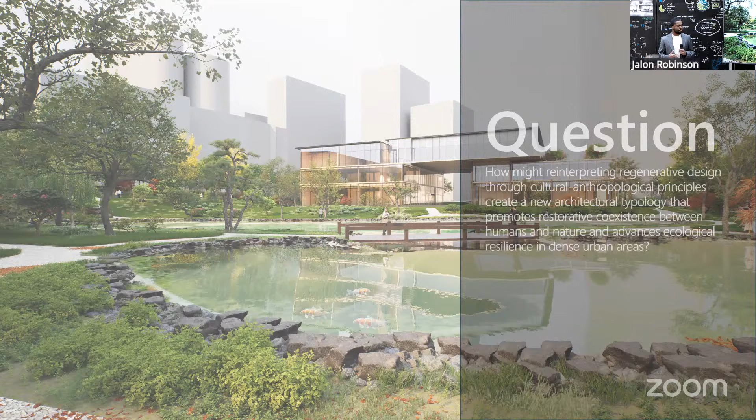Good morning, I am happy to be here. Today I'm going to start us off with: ecological performance plus human meaning equals a new way of living. To start, I want to thank my chair Professor Tillman, Professor Martinez, my mentor Balis Bogner, and Professor Kelly. This project stemmed from my interest in Japanese culture and architecture, and how using cultural anthropology as a base can reshape regenerative design.

This approach promotes human-nature relationships and restores urban landscapes. Dense cities often fail to fully integrate performance with cultural traditions, limiting the effectiveness of sustainable design. This thesis proposes a method of using cultural anthropology as a basis to create a connection, using strategies such as biophilic design, regenerative design, and natural materials to uplift the landscape and urban environment.

This architecture will embody core themes engaging with the public, blending ecology, wellness, and culture, in addition to shifting the architecture from a more passive sustainability to a more active ecological restoration.

In order to do this, we have to understand place, and I have been fascinated by Japanese culture and aesthetics, knowing Tokyo and understanding the dense tradition, its urban fabric of dense traditional and modern fabric, and its rapidly modernizing and rich multicultural history. Using this as a framework, as a test bed, would be excellent for this thesis.

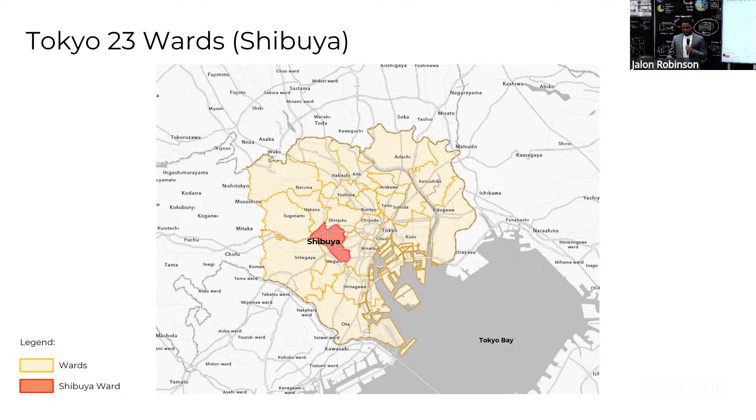Zooming into the 23 special wards, showcasing Shibuya within the special wards close to Tokyo Bay, and really looking at the cityscape. This image captures the vibrant energy of active urbanism. Shibuya is known for their dense environment and overall entertainment hub.

Looking at imagery of what it looks like during the day and at night, then finally diving into the site. Within Shibuya there are 37 districts, and this one is the Jingumae district, and this is where the project lies.

So the site is very unique. It is a large greenscape within a very dense urban fabric, and it has a very unique pond feature that sits in the heart of the site, with a tree buffer along the perimeter creating a buffer from the urban cityscape to the urban greenscape.

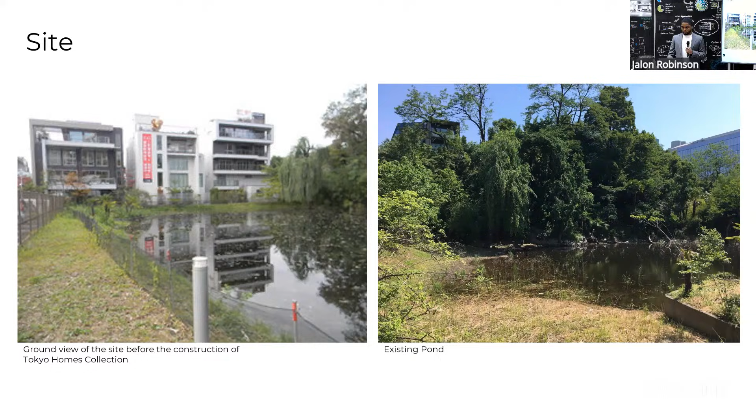In these images, you see the dense series of buildings that have been built on the site, along with the pond and the ecology not feeling as important, which we'll look into a little later. Also capturing wildlife and views directed towards the site and how to show life and opportunity. But as of today, there's little of that action with the development of the site.

But to understand all of this, we get into the Daimyo Garden. This image here is of a map showcasing the land that a daimyo garden once, a daimyo from the Yodo domain once owned and resided from the Inaba clan.

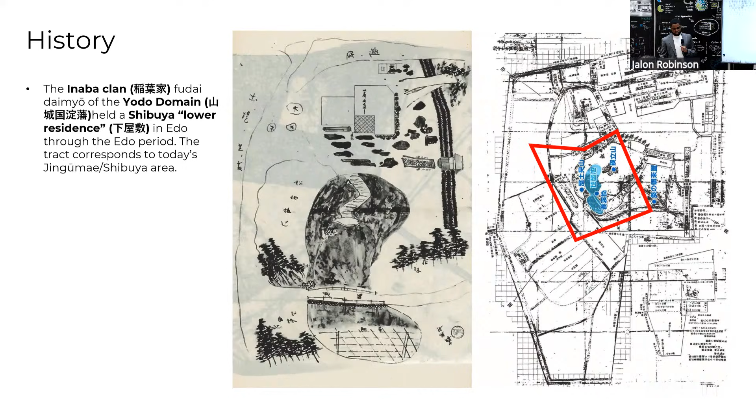These are a couple sketches showcasing what the daimyo garden was with that pond feature, leading into site maps dating back to the Edo period, showing the clan owner, which was from the Inaba clan from 1857 to 1916, where you start to see the unique shape of the pond.

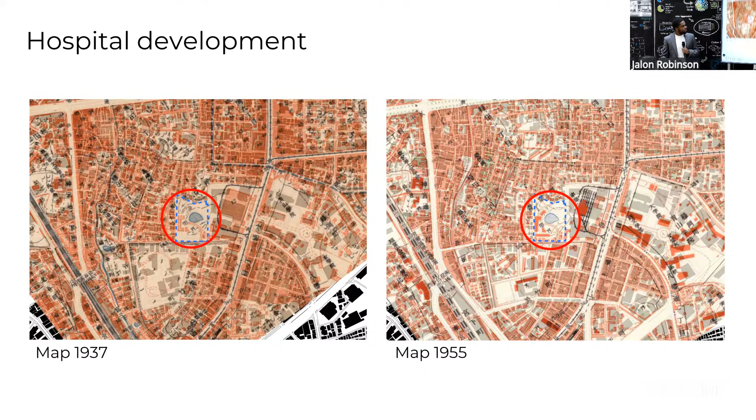Now understanding all of this, these are elements of a Japanese stroll garden featuring bridge-like elements, tsukiyama, which are artificial hills, in addition to key aspects of bodies of water, along with relationships between people and nature.

So now we look into trying to bridge that gap between history and modern time. This project aims to restore the rich environment by using those concepts I mentioned before, and an aerial perspective of what that may look like.

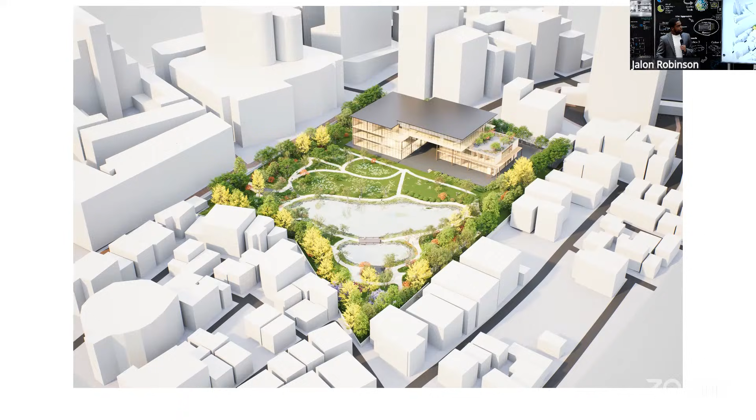Understanding the site boundary, it has a unique shape that showcases the urban ecosystem and how that resonates on the site into primary views and circulation, circulating around the site.

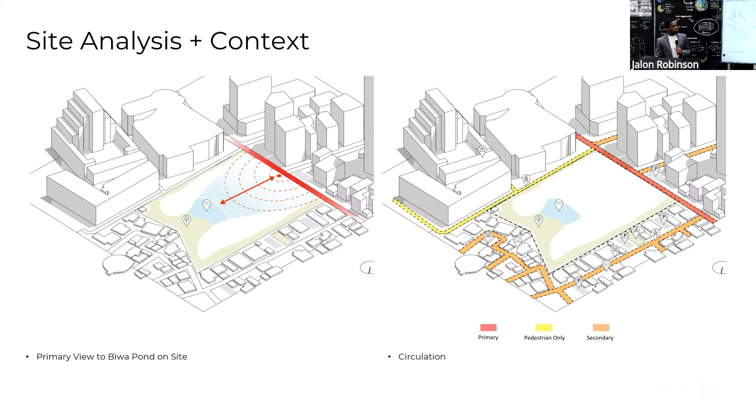And then with the site being in a type 2 residential zone for this, for Japan, it is more flexible in terms of building height.

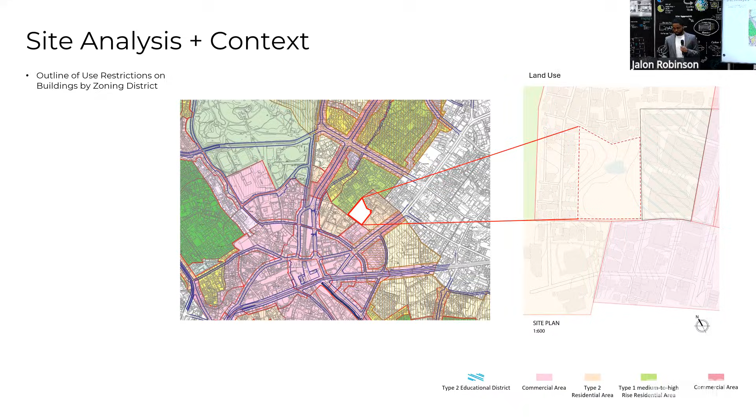And then finally, getting into the program. This program uses education, cultural engagement, wellness, research, and ecological restoration to create a living research and cultural center that creates exhibition spaces, workshops, and classrooms for visitors and workers.

So the building concept creates a geometry of two masses on the first level and second level that create a seamless connection with community, and enforces a learning environment on the second level comprising education programs for visitors, and then harmonizing that on the third level, joining the two masses, making a bridge, and allowing for a traditional exploration to take shape.

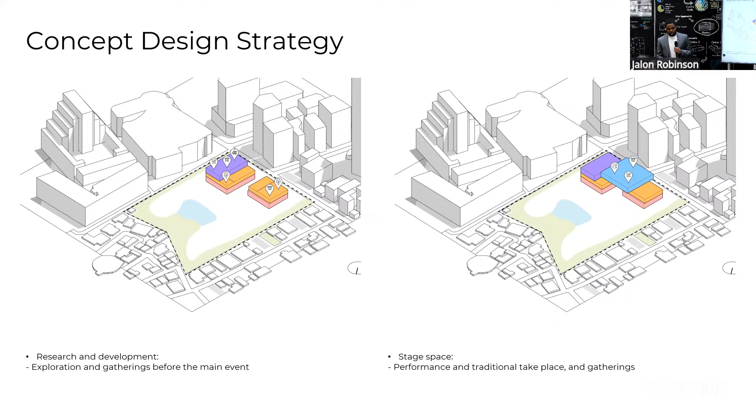A raised stage, which is the third level, creates two conditions: a gateway to the site and an elevated platform that looks out to the garden and the cityscape.

And overall, the concept gradually scales down to create a more intimate relationship of a human scale, from the large educational building typologies to a more residential, smaller scale.

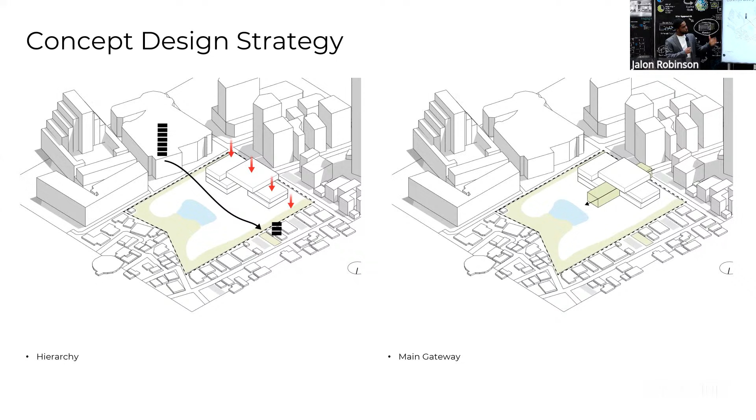And then finally, the raised stage looking out to the garden spaces, using terracing, roof terraces as an element of connection between the environment and the building.

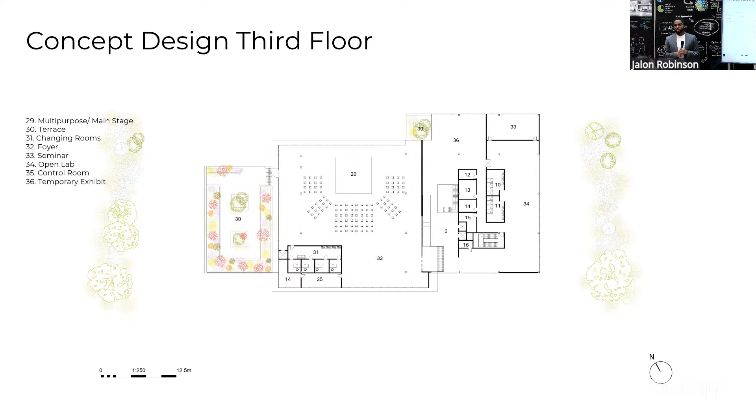Getting into the site plan. The site plan has a lot of treescape and garden spaces in front of the building to create a continued buffer between the street and the site, also allowing for mystery, which is the concept Yugen that I mentioned previously, and creating urban gardens accessible to the community.

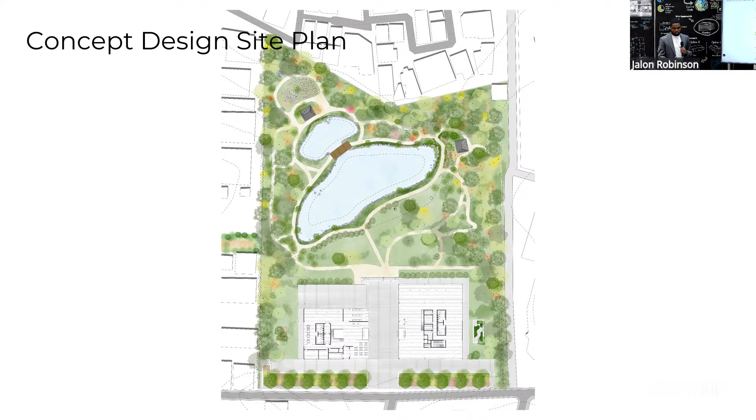The landscape and the building somewhat have a similar language, creating a harmony between the building and the landscape, stepping down in layers from that large city typology to a smaller typology.

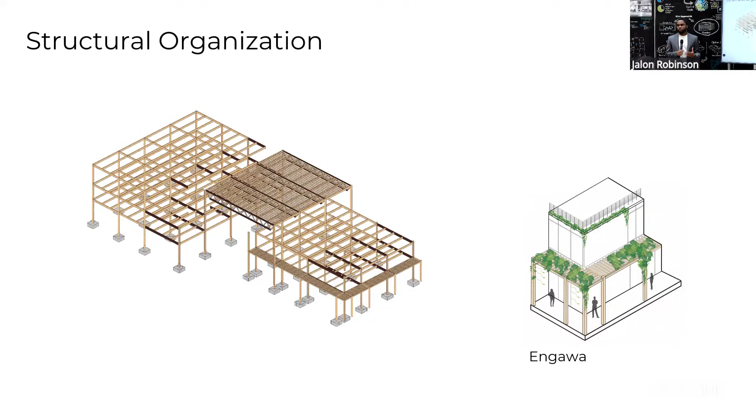The main strategy is to use wood as much as possible, to reduce the amount of embodied carbon for the building, along with a simple design focusing on natural materials composed of timber that would complement the organic nature of the stroll garden landscape.

In this image, the main entry is one of the lobbies. This is one of the main entrances into the lobby space, facing the exhibition that one would experience, giving a sense of openness.

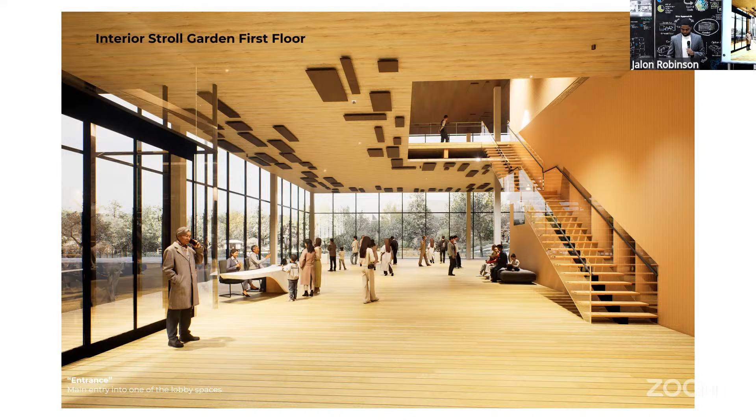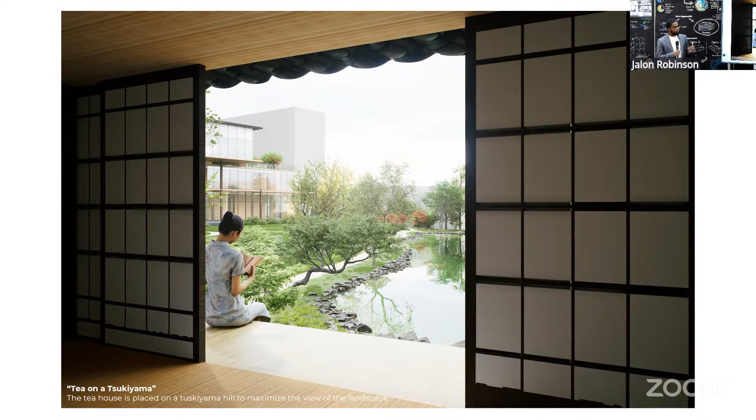Now I will take us through the stroll garden. This image right here, starting off with a tea house, is placed on the Tsukiyama Hill to maximize the views to the landscape.

In this image, we show one of the next views looking out towards another Japanese tea house and the main pond.

Smaller gardens, such as flower gardens, are incorporated within the design to help with creating different moments throughout the experience of walking through this journey, seen in this image as well.

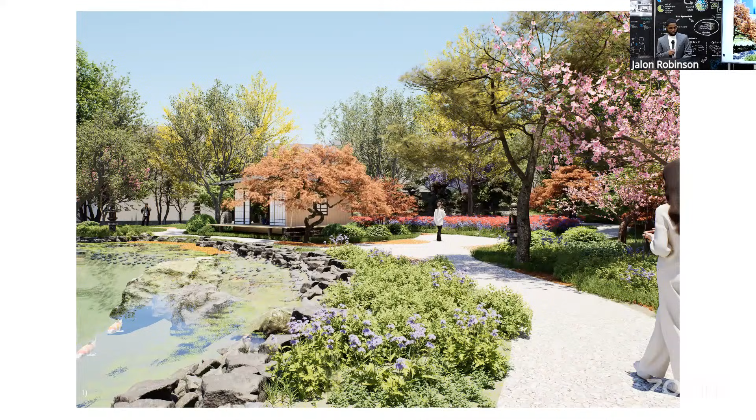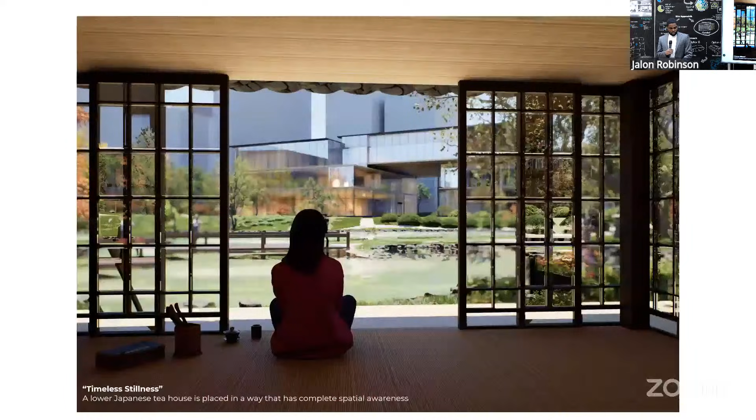And then a lower Japanese tea house placed in a way that complements the building and shows complete spatial awareness.

And the building's warm materials, natural materials, give the viewer a sense of warmth within the cold, beautiful landscape.

And finally, concluding back to the original image of the building.

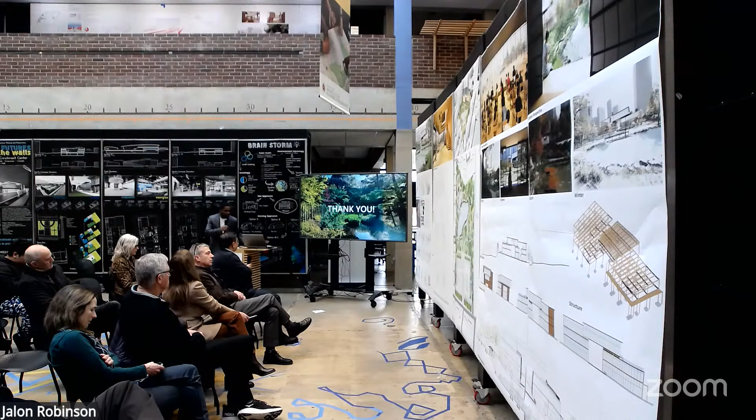I'll walk over here. As soon as you start to approach this part of the street, it really started to feel very quiet. Then as you got to this end, it started to pick up in pace. But within the site, it has that sense of quietness. It's interesting—just looking at the drawings and your presentation, the site seems like something you were entranced by, and there's a lot of effort in the gardens.

The stroll garden is the focus of the project. I think the buildings are interesting, looking at the historic aspect—the hospital was over here on the west side, right? Yes. And so you were really looking to use the building as a demarcation between the commercial and residential, to shield it.

Yes. So my main idea for this project was that the building would act as an urban retreat for the landscape. It also creates that enclosure. But the hashi, the main space between the two, is that connecting piece between the urban and the landscape.

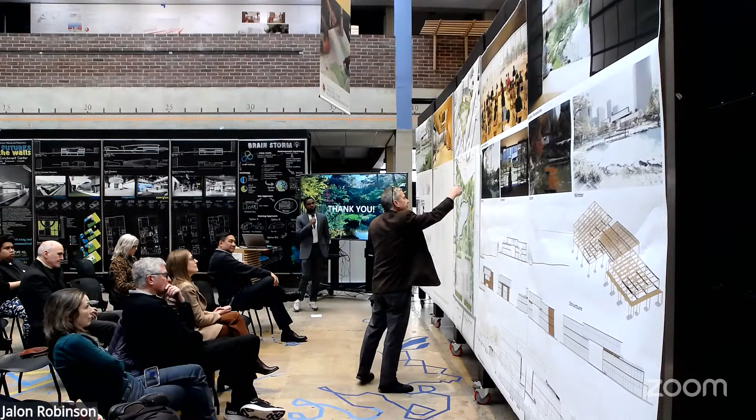And then I guess I wish the way that the plan was made, or the way the graphic of the plan is made - I wish you could read the spaces more. The trees could clump and shape spaces better. There's a lot of effort put on each individual tree, when I think clumping the trees could help shape the spaces a little bit more. The graphic of the garden could be more spatial, I think.

Jalon, hi Jalon, how you doing? Professor Good.

You've gone to some effort to make a distinction between the main body of the building and this piece on top, which kind of pushes out on one side and pushes up. Can you just talk about that a little bit more? For example, we get these exposed columns over here and some beams on the city - is that the city side, or that's the garden side? That's the garden side, yes.

And then we have this little space right here, which presumably has trusses show up here, but they don't seem to show up anyplace else. Can you talk a little bit about what this piece is doing relative to everything else?

So in that piece, this element, it's supposed to act as the raised stage, because of the thought of creating a performance space - a multi-purpose performance space that relates to the landscape. I tried to raise it a little bit to create the sense of hierarchy, and use that as the element of... what's the word I'm looking for... trying to create that overall, I guess, just trying to create the hierarchy for the space.

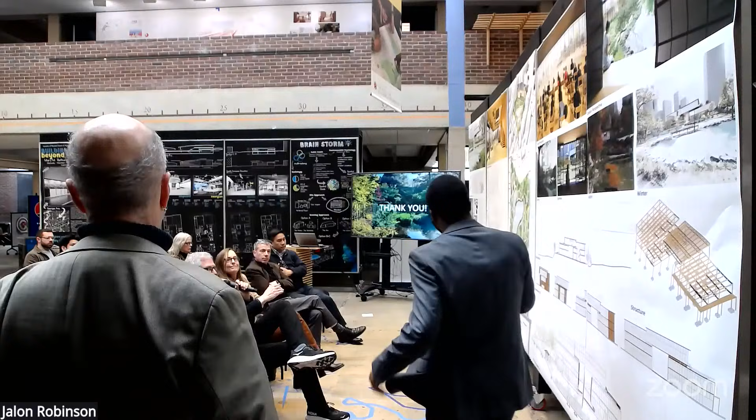So it defines the edge, but it's also within - this is also part of the garden on either side, so it's within the garden.

Jalon, I very much appreciate the completeness of your enterprise here and the analysis of the Japanese architecture. I think one of the things that is true about this project, and true in general, is the project is modern, is very modern. I think what you're hearing is it could be more Japanese. It has a kind of Miesian aesthetic to it, which is what people do these days, I suppose.

But if the project was actually even a little bit more Japanese, and still had a kind of minimalist aesthetic, I think it would be quite a bit more successful in terms of the overhangs, the movable panels, the interior-exterior relationships. I'm still uncomfortable with the way this top piece is perched on top of everything else - I don't know that that's been resolved very well, or the expression of the wood there.

And it seems to me that Japanese architecture lends itself very well to that intersection of a kind of minimalist aesthetic, the revealing of technology and inside-outside relationships. So pushing it more in that direction, I think probably would have helped you make something more appropriate to the setting and perhaps solve the problems that people have identified.

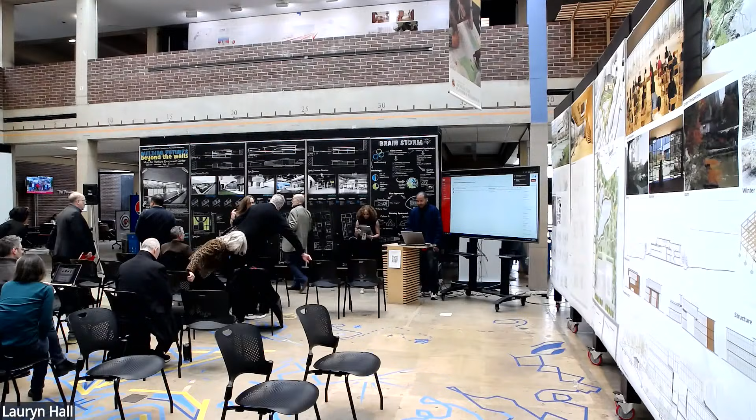You have the next PowerPoint. Yeah, you do. I mean the one after hers. Oh, that I do not. Send that without an email. I know, doesn't respond to that. She does, she responds to everything.

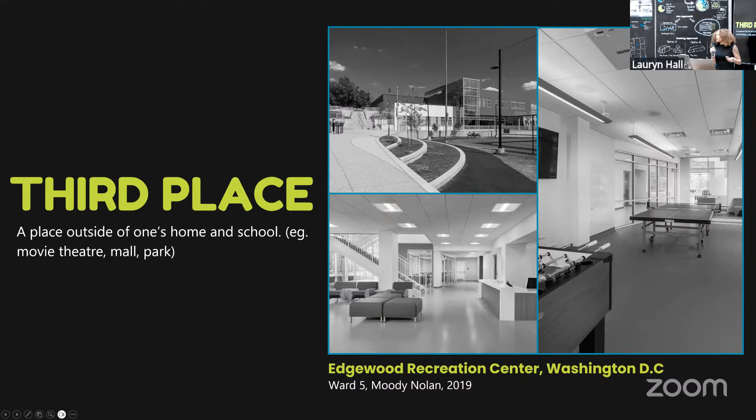So then that led me to the question: how can third places cultivate well-being and opportunity for youth in urban communities? This question's not going to be answered just by architecture. It requires a multi-perspectival solution, one that looks at psychology, sociology, outreach to students, and architecture as one.

When looking at environmental psychology, you're looking at things about how light and visibility affect spaces. It's about how spatial legibility and predictability affect one's feelings of safety in the building, how choice and autonomy in space directly impact adolescent well-being. So from this perspective, architecture cannot fix social problems alone, but it can change the conditions that produce them.

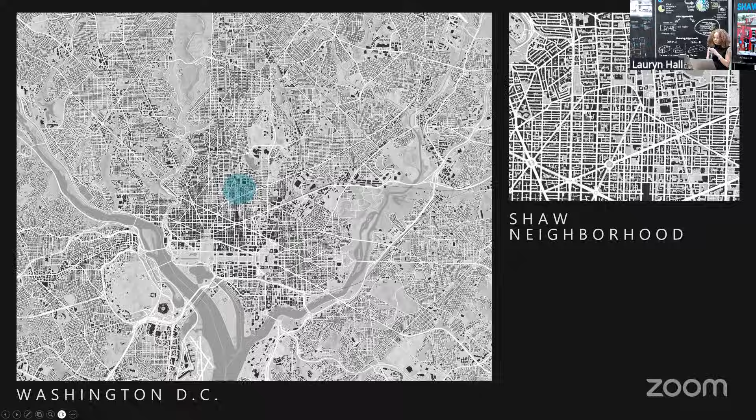Another thing about the Shaw neighborhood, it's on Georgia Avenue, a major artery in the city. It's also near the U Street corridor, which has a rich history of retail, civic, and cultural landmarks, even such as Ben's Chili Bowl.

And lastly, the Shaw neighborhood has a lot of cultural landmarks, such as the Howard Theater, which was the first theater open to African Americans legally in the United States.

What do all of these things have in common? This is a common theme we're going to talk about in this presentation: identity. I feel like the reason why some of the third spaces in DC are failing at what they're supposed to do is because they lack identity. Again, they're a band-aid solution to an open wound, and that's not going to help our youth.

Moving on to our site. Our site is located across from Howard University and adjacent to Banneker Recreation Center, which is up there. This site currently is being used as a parking lot. It is currently 7 lots put together, all owned by Howard University. One is used for the current McDonald's on the site, and the rest is used for parking.

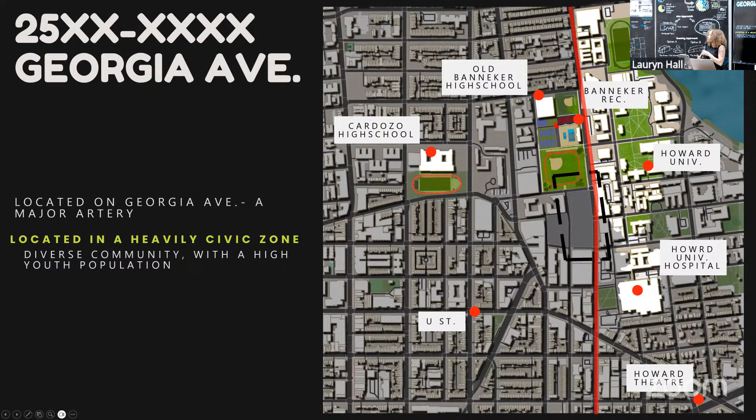Some points of interest for this site: one is to utilize Bryant Street Northwest to create an east-west civic axis. We have a strong north-south axis created by Georgia Avenue. I think it would be valuable to create that east-west axis to connect the LeDroit neighborhood all the way over to the U Street neighborhood.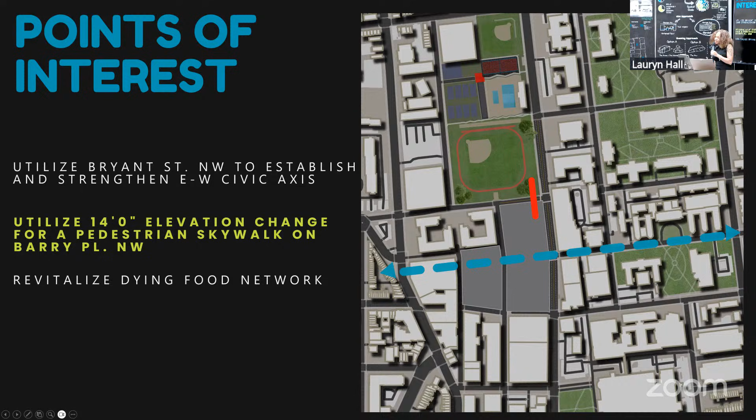Secondly, we have a 14-foot elevation change between the edge of the site and the Banneker Recreation Center. This gives opportunity to create some type of pedestrian overpass that not only acts as a landmark or wayfinding element on Georgia Avenue, but also connects the new site to Banneker's existing site.

And lastly, when I visited the site recently, all of the food items were closed on that strip right there. They've all been closed or moved to new places. So right now, this is technically almost a food desert. Those students, all they have right now is Whole Foods.

There are some smaller mom and pops on the northern side of the site, but since we're focusing right here, this main strip currently has no food. So that brings the point of trying to revitalize that dying food network that was on Georgia Avenue.

To respond to this issue, I developed a framework grounded in environmental psychology and utilizing the Journal of Adolescent Health and Well-Being Indicators. My design strategy uses 3 pillars: architecture as affirmation, architecture as empowerment, and architecture as opportunity.

Architecture as affirmation encompasses spaces that allow youth to see themselves, express themselves, and feel culturally represented. Architecture as empowerment focuses on autonomy and safety by creating clear, predictable paths for students and flexible environments that balance supervision with freedom. And lastly, architecture as opportunity, which has to do with the types of spaces offered to these students.

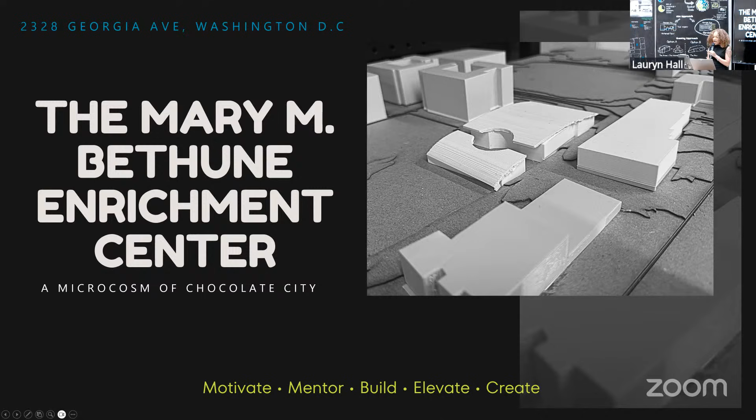With that, I present to you the Mary M. Bethune Enrichment Center. The goal of this center is to be a city within the city, a one-stop shop for students, young people, older people, or whoever the users are at the time. Looking at the massing, it starts off as a rectilinear block.

We are then carving out a circular void between the 2 blocks to make it look like there are 2 separate buildings. Those 2 separate buildings then connect below grade to create one seamless transition from one building to the next.

Also, the site has a jog at that intersection where the circular part is, about a 4.5-degree jog. This created an opportunity to test plan north versus true north, so you'll see in the plans that we are grappling, trying to do both in one singular building.

Looking at some of the key spaces in the building, we have an aesthetics studio where people can learn how to do hair, nails, facials, and eyelashes. We also have a teaching kitchen where we can do different types of events and teaching classes. We have resource centers and a culinary hall in this building.

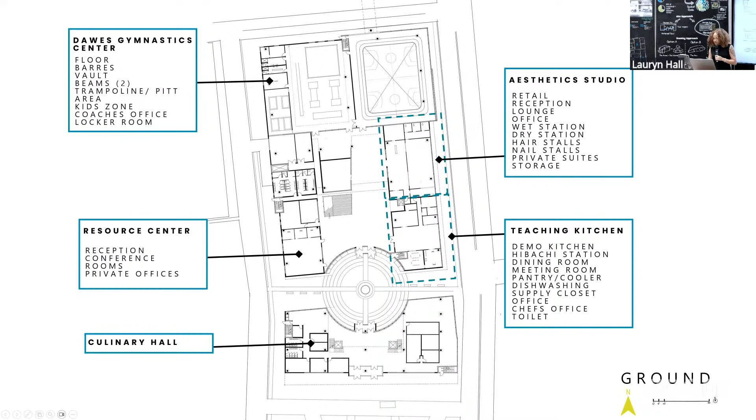These spaces are flexible to hold many types of learning, focused learning and individual learning. It's important to provide that spectrum of space types to create autonomy, because I don't want to be prescriptive in these spaces. I want to guide them, but not tell them how to use these spaces. So this gives them that flexibility.

On the third floor, we have the remaining of the athletic center, which focuses on boxing gyms. We also have a women's only gym for people who need privacy. And then we have a plethora of fitness studios that can hold cycling classes, yoga classes, Pilates, again providing that opportunity and flexibility to do whatever you need with the space.

Going down to the basement, we have our Bradley Beal Athletic Center with our indoor turf field, our multi-courts, and our batting cages in the back. We also have our Chuck Brown music producing studio, our artist labs, and our photography studios.

Secondly, we have in the middle our teen lounge, and neighboring our teen lounge we have a retreat, which has quiet pods for people who need to get away. They are able to go into this space and get quiet time.

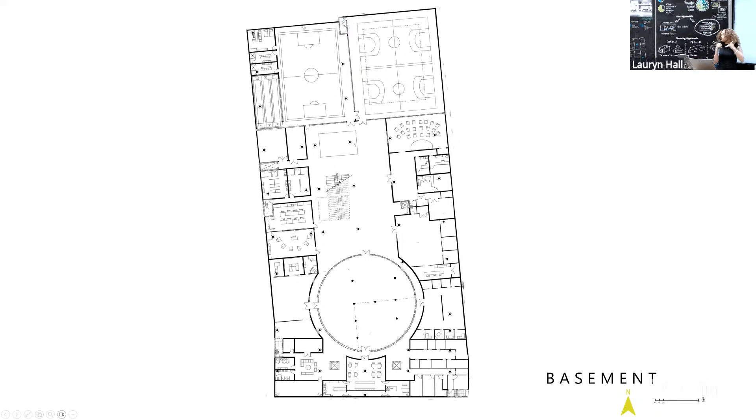How am I testing and checking if I'm actually doing what I'm supposed to be doing, intending to do? I'm looking at the domains from the indicators of well-being, and I'm also deciding what spaces and features I included that tell me I'm actually doing this. This was my checklist to say, okay, this is safety. So when I bring this back to my focus group students and they look at this, I can compare my analysis to their analysis of if I'm actually doing what I intended to do.

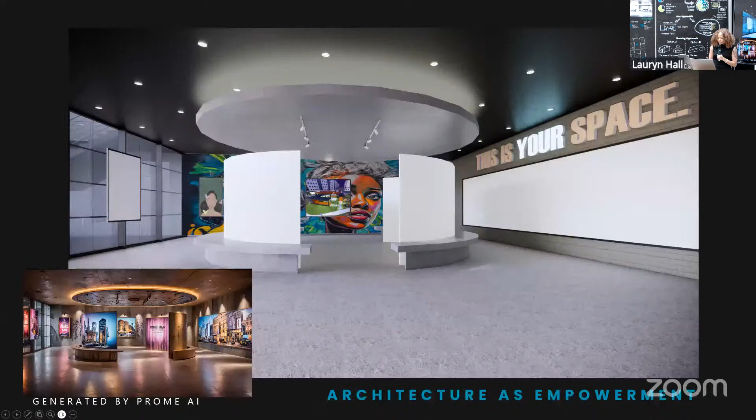Secondly, we have architecture as empowerment. This is our gallery - a blank canvas for people to add their story in DC. I've added my story, but it's time for people to also add theirs. Again, similar to the last one, I put it into AI to see what it would give me for this gallery with no prompt, and this is the image it gave me.

Lastly, we also have architecture as opportunity. We want to give these kids things they may not have known were possible. When I was in middle school, I didn't know about architecture, but when I joined the architecture club, now I'm here, and that's because of opportunity. So I'm trying to pass on that same opportunity to these kids. I've had so many opportunities, and it has changed the trajectory of my life, and I think all kids - all people - should be afforded that.

In conclusion, this thesis demonstrates how architecture can move beyond shelter and become a tool for affirmation, empowerment, and opportunity. It centers youth identity, encourages agency, and creates visible pathways to growth. This building tries to reframe architecture as an active force in shaping confident, capable futures. It acts as a shift from temporary fixes to long-term empowerment - from band-aid solutions to real solutions, and from passive space to active well-being. Thank you, and I look forward to your feedback and questions.

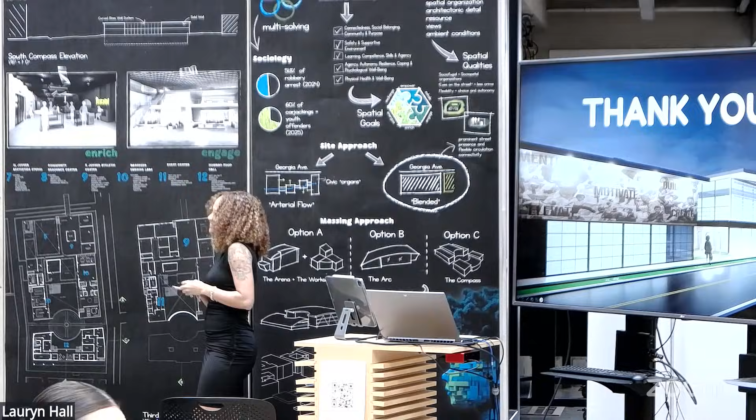This is the Roman Catholicism coming out in me. I've just blessed all of you.

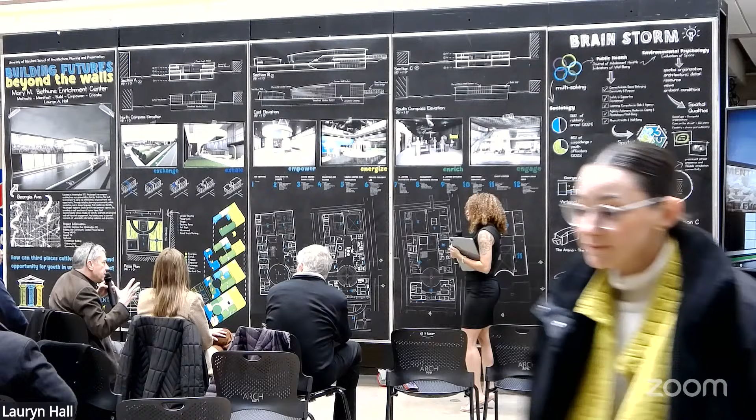Is it, if you thought about that, is it what you wanted to make? I think it's such a great question.

Make something big and small. Can you make something big, or make big program elements feel intimate? Yeah, and feel smaller? Yes, see, yeah.

A lot of energy and passion, and a lot of great ideas. I see a lot of opportunity for that in the plan.

I think the street side comment and, back to the previous comment about your architecture and where your passion truly lies. But I think within the plan, you have the beginnings of creating some of those spaces, and you mentioned some of them. I think where the community comes together in the center is a fascinating discussion and would have been wonderful if you would have had time.

I realize this could go on forever, but to see how that would have been recognized and how the interior streetscape of those individual spaces that you have created in plan, how those form an interior streetscape and how someone finds their place.

You wrote wayfinding as one of your goals and that sort of sense of identity. And in such a large complex, which has an amazing programmatic set of opportunities for occupants, how does someone find that? And what is the wayfinding that you designed around?

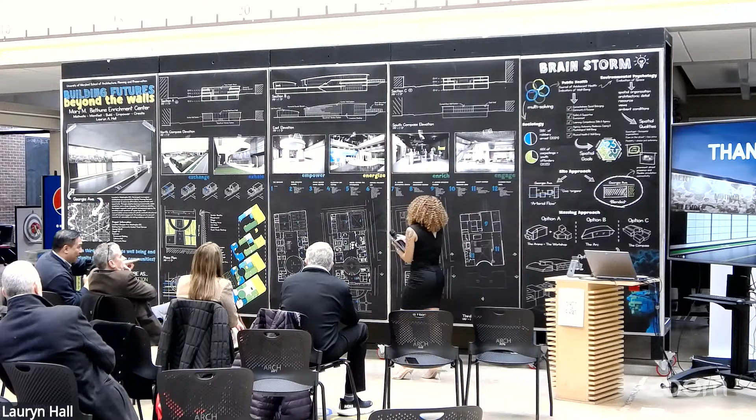So you've got 100,000 square feet on a floor, a second floor, a partial third floor, and on top of that close to 100,000 square feet in a basement. I would just ask you, why not lift everything up out of the ground and create, as Rob was just talking about, more of a village or community aspect? Especially since what's happening on Georgia Avenue is really bereft of activity, it seems a lot of this stuff could come out of the ground. You've got a much bigger site too, with all this stuff south of the circle. I'd think that all that program, 400,000 square feet we were talking about earlier, could be something really energizing to the community rather than putting it all in one thing.

I did a community center in Brownsville up in New York, and my community center, one of the largest in New York, was only the size of your rotunda and a basketball court. This is an incredible amount of program, and I'm struggling to feel how it's organized. What is the outlook? What's the in-look? What are the pathways through? I see you have a grand stair and a pathway up to the second floor that culminates in a bridge that goes across, and I think that's great. But then how does that fit with this airfoil roof? I'm struggling with the scale issues, and whether this airport metaphor is really appropriate for the neighborhood.

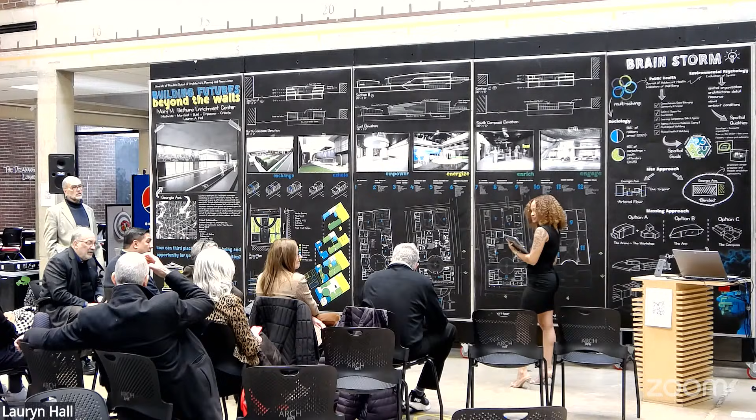It's a little smaller than this, but we did it a thousand years ago. I did its rec center, gym, theater, what's it called? The Arc. THEARC. I think the one in DC in Southeast, right? Yeah, I visited there. Smith Company did it, right? Yeah, you know that project? Yeah.

Sorry, nobody was raising their hand. That's where the confusion got in. Okay, I'm going to pass this back, because we have a big logistical thing to go on here.

I think what we're hearing is that this was a spectacular presentation, and that the architecture could still rise up further to meet the level of the presentation. That said, I think you should bring this back to folks in Parks and Recreation in DC, to people at Howard University, and maybe other nearby cities, to hear what they have to say. But the tradition here is the last word goes to the committee chair.

Thank you very much, Brian. I want to commend Lauryn for tremendous work, and raise this awkward point that Lauryn changed her site and project over the summer, and was able to regroup and reconnect and bring it, personalizing it, because the project she originally started with was in Chicago, and then she decided she was fighting it. I think you pivoted and regrouped wonderfully.

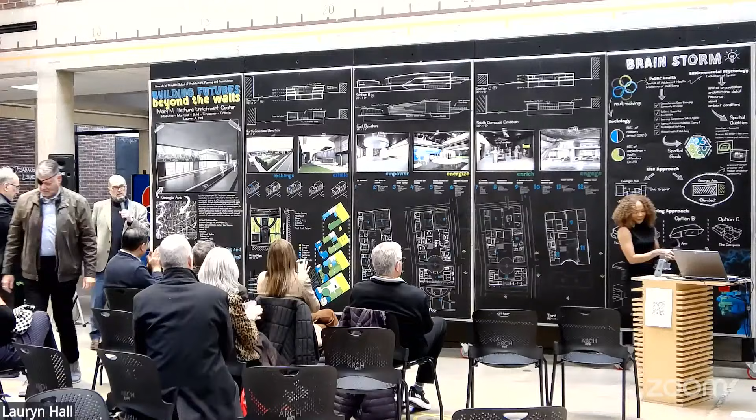Thank you. And if you look closely, not only is it a blackboard, but these photographs that don't belong on blackboards have been taped up with Trompe l'oeil tape. I came up front to see if it was real tape or not. It's a good trick.

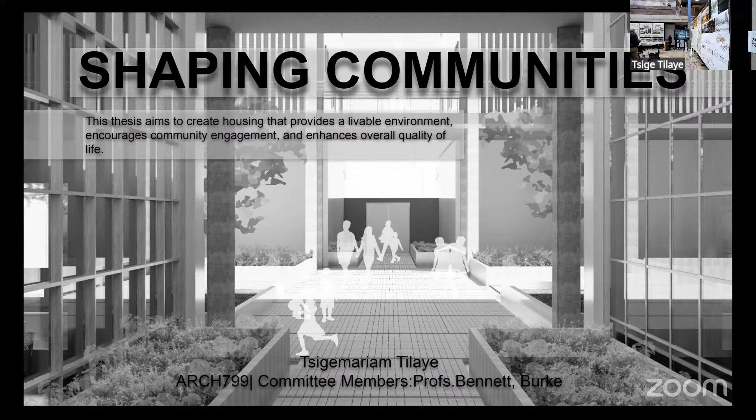Hi everyone, so shaping communities. Ethiopia is facing a housing crisis right now because of economic pressure and income inequalities between high and low income communities, and rapid migration from different cities to the capital city. People are moving for jobs, for education, and overall for better opportunities. The demand for affordable housing is increasing, but there's not enough solution for everyone.

So right now the solution is becoming a shelter rather than a livable, dignifiable space. The government is responding two ways. The first is Kebele housing, which started back in 1975 when the government started taking secondary homes from landlords and giving them back to low-income communities. When that wasn't enough, they started one-story communal buildings shared between 7 to 10 families. But these housings are not well kept and don't have proper sanitation or waste management systems, making it hard for people to live in these situations.

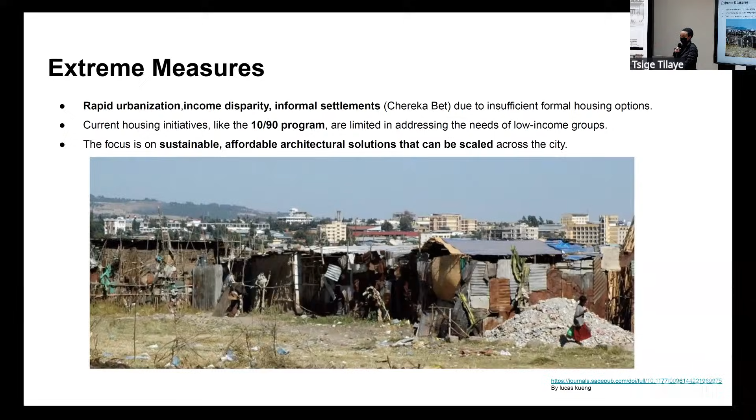Some design flaws of the 10/90 program: it only has one accessible point, not considering wheelchair users or seniors who don't want to take the stairs. Also, the common area is only the circulation space, and for the low-income project they don't develop the ground floor, which should be community space. It's also located at the periphery, making it hard for low-income communities to get to their jobs and access proper infrastructure for essential needs. This makes them feel socially isolated when it should be solving the problem, and they're losing some of their culture, since they normally do everything together, eat together, and have coffee ceremonies. So how do we respond?

So affordability shouldn't just be the solution. It should also create a space that's culturally sensitive and socially integrated. We respond to that by creating a semi-private connection with neighbors, with outdoor space and green spaces by developing the ground floor. We're also responding to cost by making it modular and prefabricated.

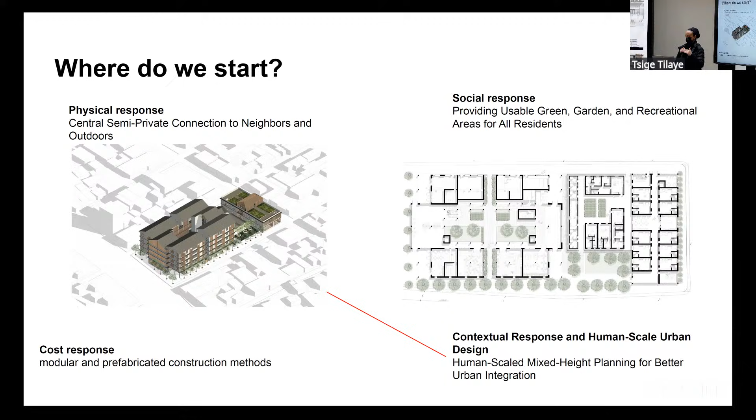It can also be human scale, because one issue with the existing solution was that it's pretty much the same height. Since people aren't used to vertical settings, providing human-scale variety in building height would create better integration into the area.

It could also involve collective maintenance, where residents maintain gardens or common spaces, and it can be incrementally grown, so they chip in what they have and over time finish the process. We're creating green buffers for safety, and since studio units are overlooked in the existing solution, we're providing a studio apartment as well.

The site itself is located at Addis Ketema, which is not in the periphery. It's about 6 miles from the central business district, with both residential and retail zoning, so you can have souks, or convenience stores, within the lot. It has access to essential needs and is near Mercato, one of the biggest open markets in the continent.

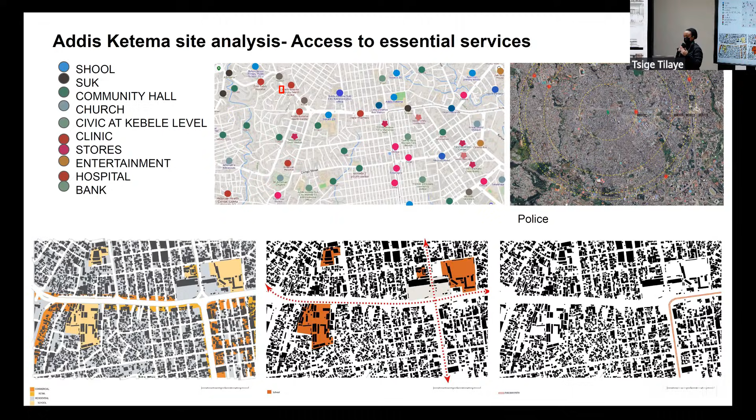These are some of the essential accesses within walking distance, and there's public transportation within about a 4-minute distance. This makes it a great location.

The other reason the site was chosen is because it already housed informal settlers—though I can't point out exactly which one, it's within this picture. The existing site has 2 cafes, and the building height is very diverse.

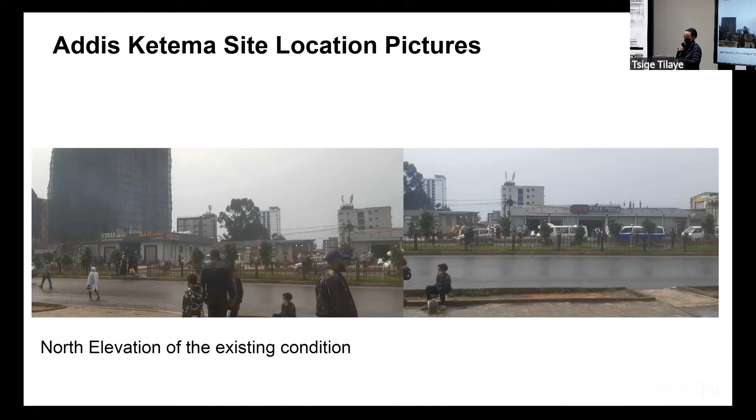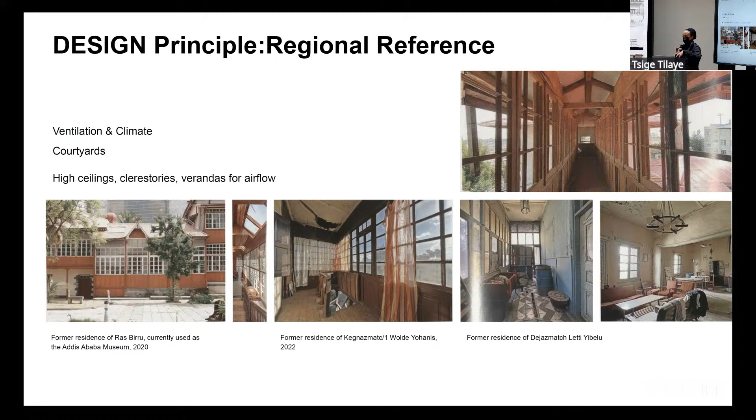Some of the design principles or regional references include the veranda typology already existing in the development's architecture. It helps with ventilation, and it can help people engage within that space, or serve as a common area for the units.

What I'm introducing is 3 building types. The first would be a multi-family unit housing about 48 different units on the lot. The multifamily housing base would have a commercial base with souks on the east end.

The second phase would be formalizing the moon housing I introduced earlier, making it an incremental building where people can build what they can, and we provide a shared kitchen and bathroom since that's the most expensive construction. Over time, if they can afford to add their own within their unit, they can take down the shared kitchen and bathroom, creating more units for that lot.

The third type is a studio apartment. As you can see on the floor plan, the main access is on the north end. Once you get in, you can access the ground floor garden. There's also a side entry, and an existing tertiary path on the site, which is why there's a space between the moon housing and the multifamily units.

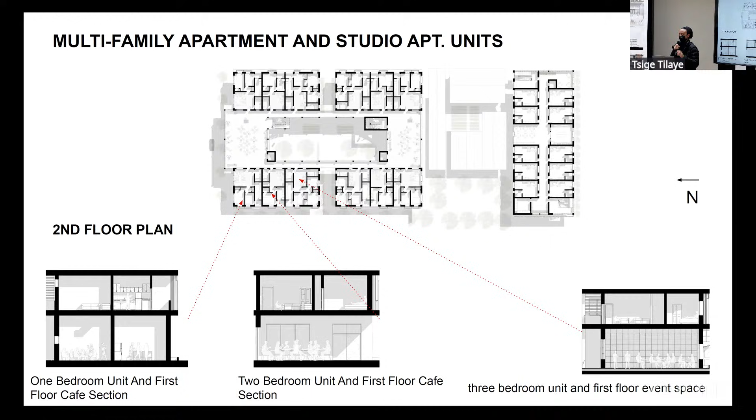For the studio units, there's a shared dining room and shared kitchen to make it more affordable for studio tenants, which isn't addressed in the existing condition—they provide enough space but not affordability for studio tenants. As you can see, that shared space can be used for many things.

People back home pray together, eat together, and pretty much do everything together. And for the studio units, there's a rooftop, shaded rooftop, gathering space, and edible garden.

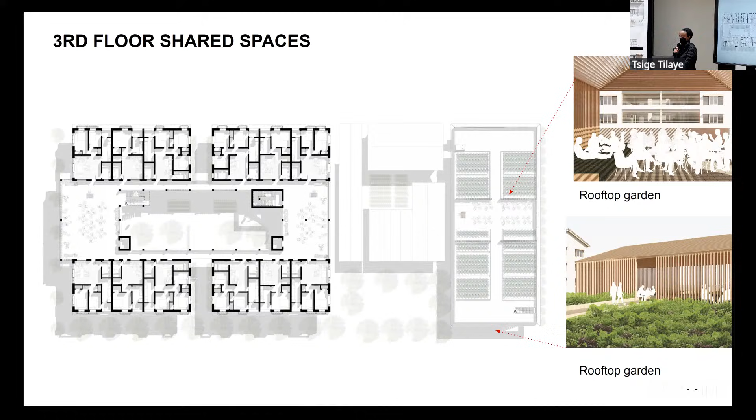So how is this feasible? Because there's an existing condition right now. So on the first phase, we're doing this in phases, and phase 1 can house the whole lot. Then after everybody's moved, we can do the rest of the phasing. So this is how we're phasing it. First, the first mass of the multifamily unit. And then in phase 1.5, we introduce the other half, which has other 24 units.

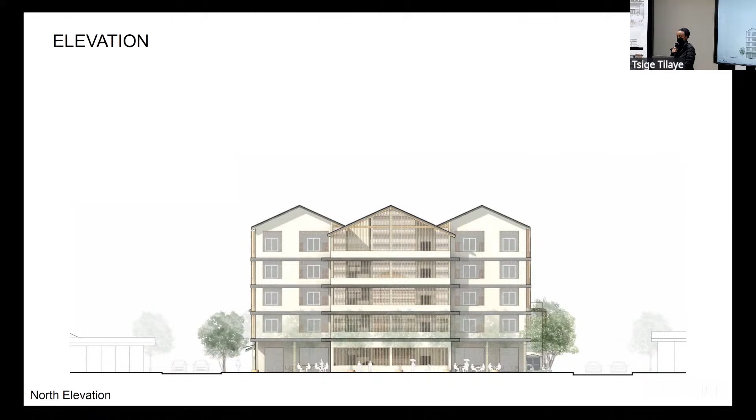So the material is wood for the louvers, and concrete is used as both a structure and a finish because that's the most affordable material.

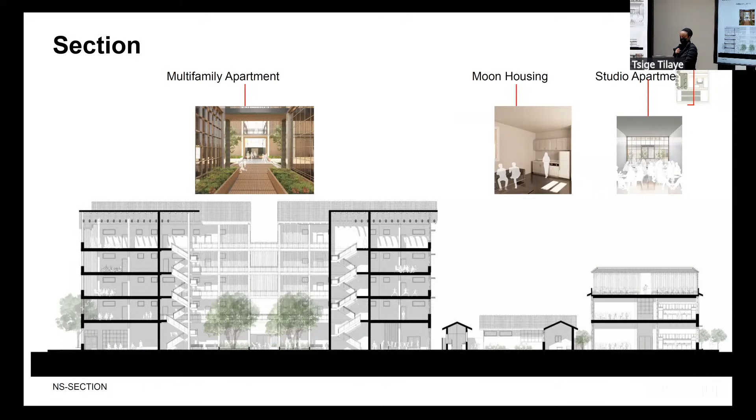So in conclusion, housing shouldn't be fixed, it should be transitional. This project is pretty much creating an ecosystem where people can transition from renters to owners. And housing shouldn't just be a shelter, it should be a dignifiable living space. Thank you.

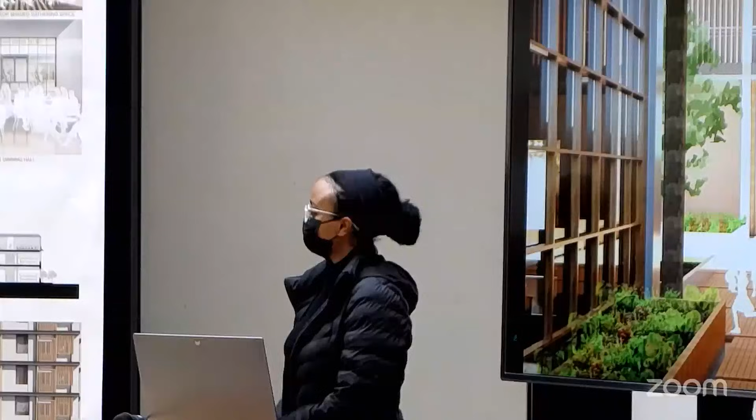I want to commend you in the sense that some of the imagery you have here for the spaces are really beautiful. Some of the perspectives you're showing, the wood in comparison to what we saw earlier, you really have taken the wood framing to heart, and it shows up not only in the spaces but in the screening. I think this is a very evocative image of the studio apartment rooftop garden with the screen as the full wall.

So I'm intrigued. I just want to dive in and get a sense of what that space could be. Could I ask, in terms of the makeup of the families living here, are they mostly mother, father, children, mother-in-law? What size families are we typically talking about?

So culturally, people live with their extended family. That's why I'm providing the incremental housing as a more open setting. But for the apartment, it's 1 to 3 bedrooms.

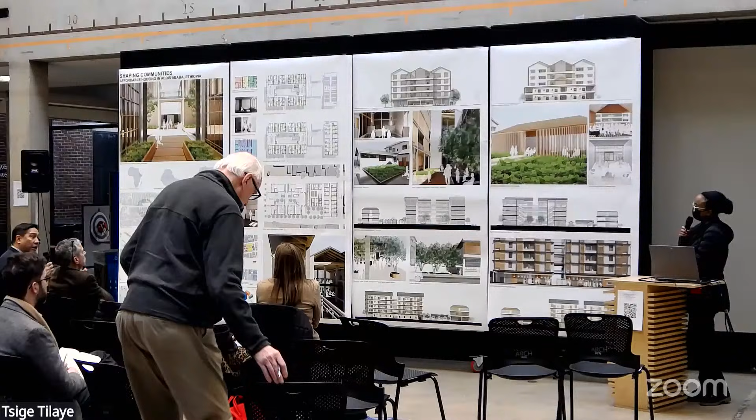So whatever. Got it. So the idea is that maybe somebody starts off in the moon housing in a studio apartment, and then, as you said earlier, maybe they get married, or they move with their mother or father, they move into one of the apartments in the multifamily units. I think that's interesting.

In my experience in New York, one of the things developers always want when they lay out building layouts is a 2 bedroom, but you got to put that junior one right next to it, because in many cases, the family in that 2 bedroom will want to expand and, as you said, knock down a wall.

It might be interesting to see if you could incorporate that also into the multifamily apartment. In other words, obviously have some studio apartments and the moon apartments, that's great, but is there a way to incorporate that time aspect into the building itself? As you said, things will contract or expand depending, but to have that flexibility in place, just to give that extra reflection of how that community interacts, I think would be fascinating to see.

Because I don't think you need to do very much. I mean, you see your partial floor plan for multifamily apartments. If that 1 bedroom unit were maybe either a studio or could have flexibility to be attached to the pink one or the green one, or all of them attached at once, because I think you've set it up with all the public spaces on the public areas, I think it would be very simple to try and add that extra dimension into the planning. But I think you've arranged it beautifully.

Well, it's very well drawn. I think that has been said - very well drawn, and I like it. I mean, I think this would be very nice. This would be very nice. I think commercial here.

I guess I want a tougher edge here, just a straighter edge. You put a bump on it, I'm not quite sure what that is. But I wish you had done more with the space here that would allow us to know what you were thinking about and how these commercial spaces related to the street. But that's really it.

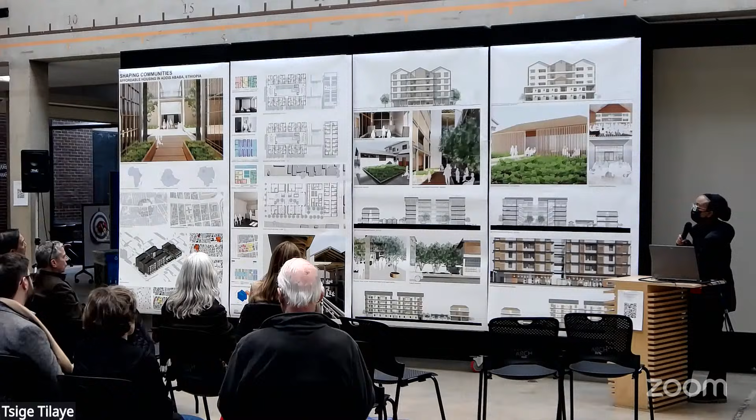The one thing you might consider is those beautiful elevations of the entire block. If they were to extend across the street, even that primary street that shows up in the figure ground site plan, or to the similar blocks on the side streets, that would probably answer the questions Rob is raising. I think you've done a wonderful job creating the interior life, architecture, and social situations of the block inside. The question is how this fits within the larger urban context at the perimeter, which you'd start with a street section that goes all the way through.

When I compare these two plans on the first board and the second board, what's interesting, as Rob pointed out, is the block is not a perfect rectangle. The north edge and the west edge are deformed. So I wonder if maybe the buildings are orthogonal, but some of that slack was taken up either within those internal courtyards, or these external forecourts could give some hierarchy to those spaces.

The one question I have about the two rooms on each of the upper floors is how are they used in this community and culture? Because one is in the middle of the block and it's going to be much quieter, the one that's slightly smaller, and the other one is facing out onto that main street. So that's a question I have.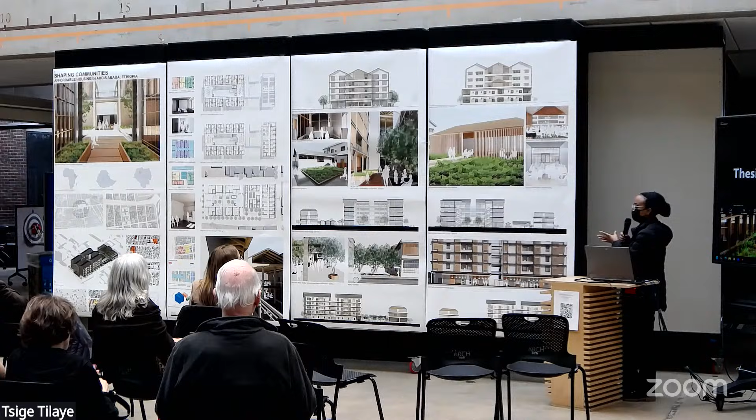So the north and the south end is connected with a bridge, so any of the space can be used however they want. Each space is not defined for one thing, but it's a common space. Right now it's being used as a coffee ceremony area where people can gather and drink together and catch up with their neighbors.

I wanted to compliment you as well. I think based on the problem you described, you've seemed to have solved a massive dearth of housing in your community. I hope you get an opportunity to present it to your public leaders, so they can have a perspective from a resident that is pure and connected directly to the community. The fact that you have so coherently summarized the challenges and provided a very viable solution is something public leaders are always enriched by, hearing directly from the community and seeing a solution that so thoroughly addresses the needs. I hope that opportunity is presented to you, and that you can take it.

I agree with one of the first comments about even more integration. If you were able to continue working on this project, integrating the different types of residents so a studio apartment is next door to a family apartment, is even more of an integrated community - I could see some serious benefits there. Although at the same time, I understand why you've zoned things, because some of them have shared amenities, and proximity to that is of course important too. So it's a bit of a challenge to achieve that integration.

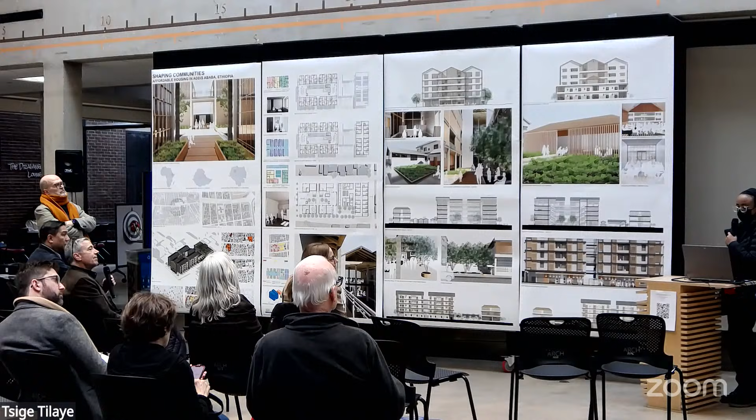So if I show you some of the gathering spaces—everything is pretty big, but set in that. This is three, six, nine, that's twelve units, and that's that space and that space for the twelve units, and that happens twice. And then there's all of this—these are shops, right? Yes, but there's all of this. You would squeeze a lot of that out of that. Is that the right amount?

I guess I'm just asking the question. So I wanted to provide enough options for everyone—even on the ground floor, there's a multi-purpose event space where people can gather in a small setting, facing the public garden. Even though it seems like a lot, since it's provided like the ground floor for the 1090 units at the beginning, it's never developed, it's never considered—so I don't think that's a lot.

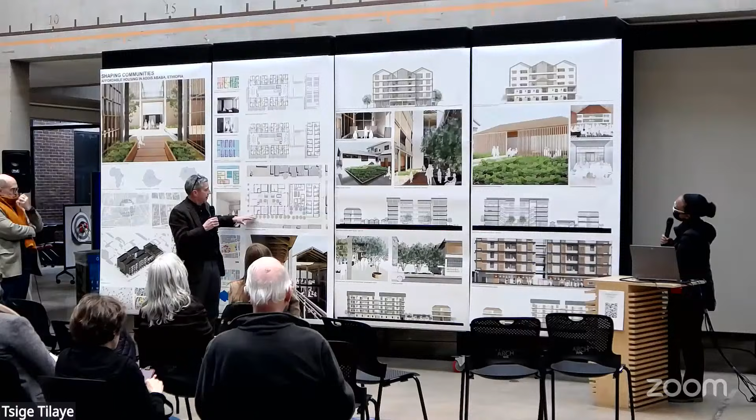One more question—what is the character of this street versus the character of this street? Because this one all has shops on it, but here you're making an overt motif to make this a public walkway, to connect to a public garden. You don't make the same effort on this wall that you made on this wall to be extroverted, to make this comfortable. It's a very public gesture, and yet the wall is a very private gesture. Is there some discrepancy there?

So the reason it's a walkway, or like a walking trail, on the west end is because the other lot is a residential unit; on the other end it's commercial. The shops are facing a commercial unit, so having that type of crowd within the west elevation wouldn't be the best decision.

It just makes me ask a question I probably should have asked during the process—what is the major religion? So there's no major religion, but mostly a different type of denomination of Christian or Islam. Okay, because I'm just thinking back to Islamic architecture, the courtyard space is usually very heavily protected by the periphery of the building, such that you don't get moments like this where you could stand here and see into there. There's always a disconnect, a kind of series of vestibules that you go into.

When Rob was talking earlier about the mean streets, to me this street seems to be the meanest of them all. If you look up here, it doesn't seem as mean as where you're located. In part, what's made it mean is buildings from the 20th century that couldn't agree on where the edge of the street was, so some of them align one way, some align another. Maybe there's no way to compensate for that.

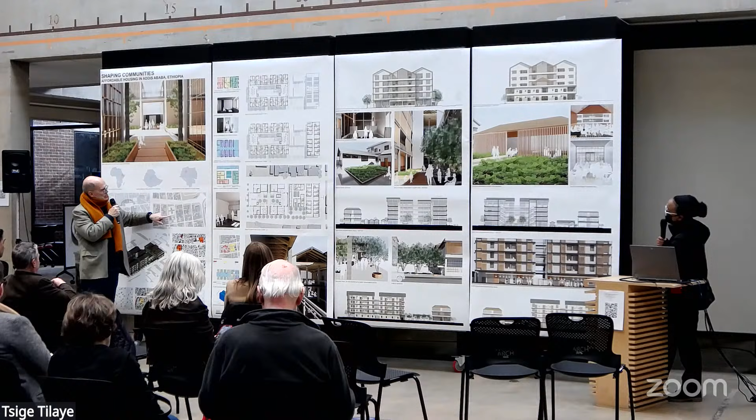The other thing that strikes me is that there's big, medium, and really tiny going on. I agree with what Terry said about the aspect ratio of that courtyard at the moment. It's a little better than before—remember we had a toaster before, really tall and narrow. It's gotten better, but I'm wondering if some of that program could be decanted and spread into that area to make a better proportion for the courtyard space.

The last thing I'd ask myself is whether there's a way to take this pristine geometry of the plan, which is very well thought out, and put some fabric softener in it to relax it a little, so there's some poche or something that recognizes the needs of the urban and public realm versus the private realm, acting as a kind of rapprochement between the two. But that's something you can think about in later life.

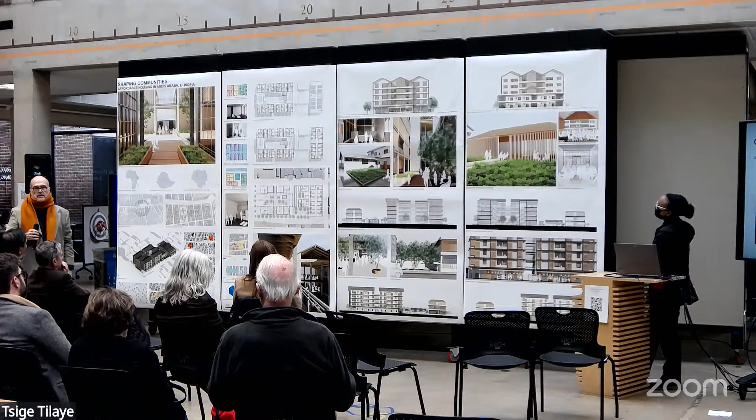Professor Bennett, do you want to stand and deliver here?

I first met Tsige last March, and we've met together weekly since then. I think I've learned way more than Tsige has about the difference—and you've hit on it right away—the looseness of family structure in Ethiopia. She is providing three prototypes which can be used in stages, and blocks can have all three types if appropriate. The smallest one, the Moon House, is most illustrative of the fact that this building offers a transition between ownership and rental. There is an owner of that complex, but with that owner live other families and individuals paying rent until they can build a house like that. What's stunning about the urban site is that the vast majority of it is one-story self-built buildings, and what she's offering is a type which continues that possibility but offers alternatives as well, with types we can see more clearly.